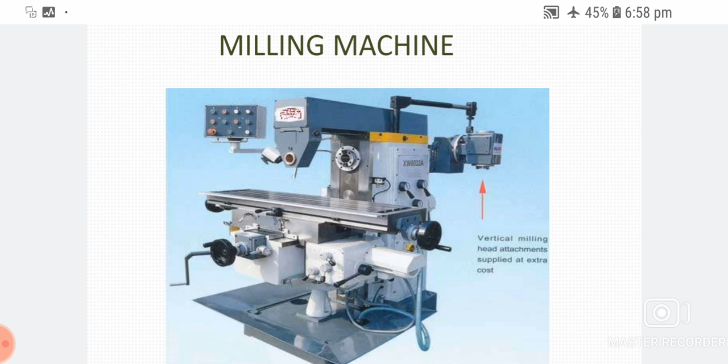Next, we can move to the topic of milling machine. There are three types of milling machines available in industries: one is the horizontal milling machine, another is the vertical milling machine, and another is the universal milling machine.

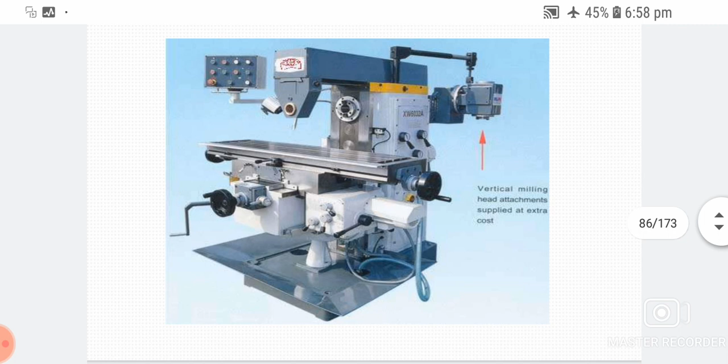Vertical milling head attachment is supplied at the extra cost.

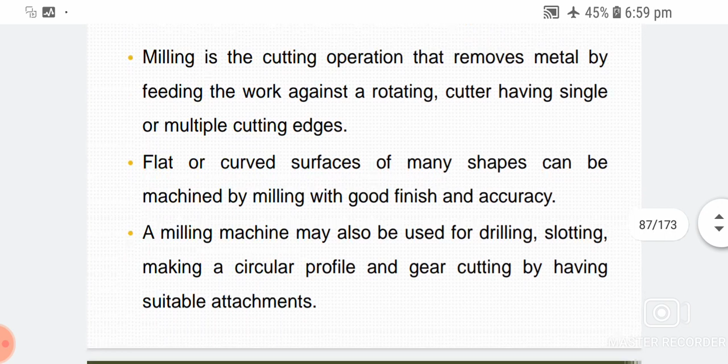Milling is the cutting operation that removes metal by feeding the work against a rotating cutter having single or multiple cutting edges. Flat or curved surfaces of many shapes can be machined by milling with good finish and accuracy. A milling machine may also be used for drilling, slotting, making a circular profile, and gear cutting by having suitable attachments.

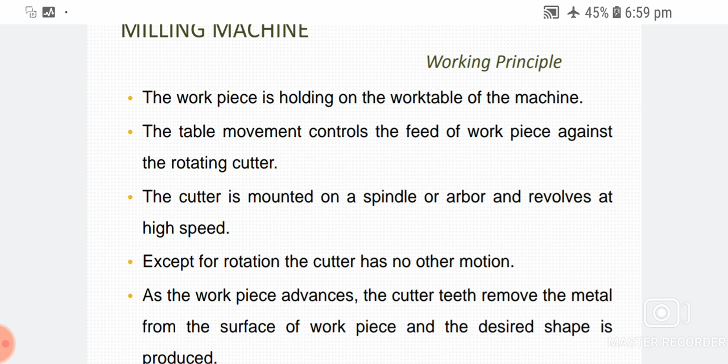The workpiece is held on the work table of the machine. The table movement controls the feed of workpiece against the rotating cutter. The cutter is mounted on a spindle or arbor and revolves at high speed. Except for rotation, the cutter has no other motion. As the workpiece advances, the cutter teeth remove metal from the surface of the workpiece, and a desired shape is produced.

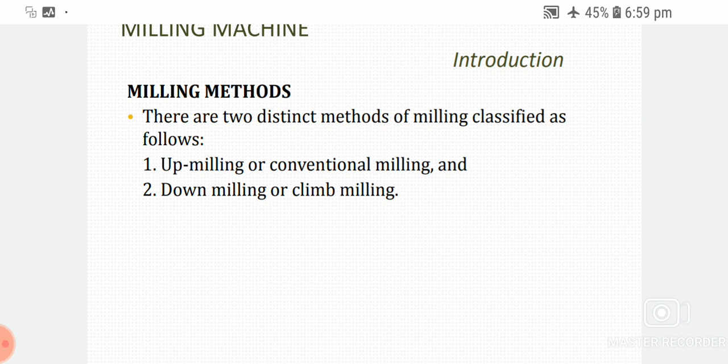There are two distinct methods of milling, classified as up milling or conventional milling, and down milling or climb milling.

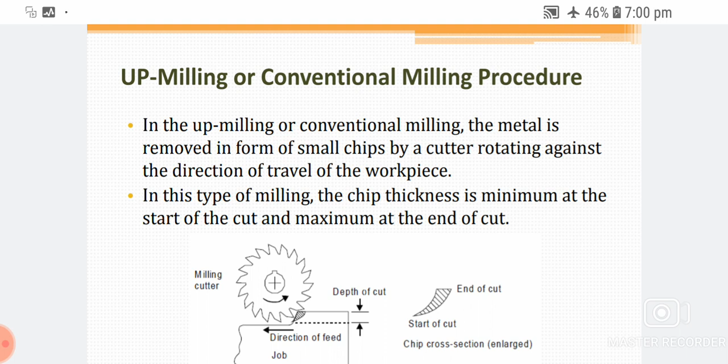In up milling, or conventional milling, the metal is removed in the form of small chips by a cutter rotating against the direction of travel of the workpiece. In this type of milling, the chip thickness is minimum at the start of the cut and maximum at the end of the cut. This is the principle of up milling.

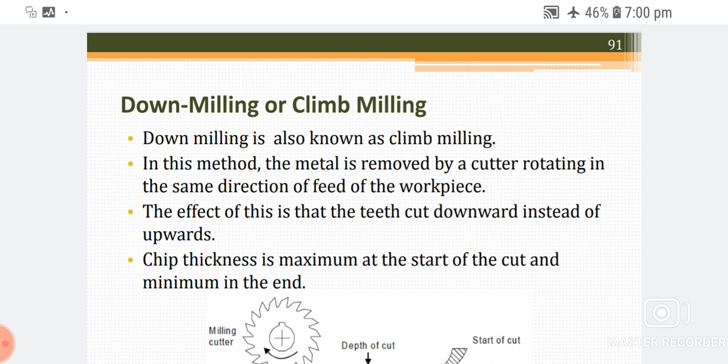Down milling, also known as climb milling: in this method, the metal is removed by a cutter rotating in the same direction as the feed of the workpiece. The effect of this is that the teeth cut downward instead of upward. Chip thickness is maximum at the start of the cut and minimum at the end. This is the principle of down milling, as shown in the diagram below.

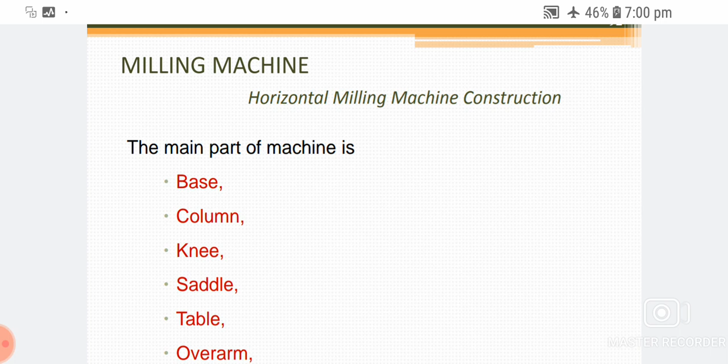Horizontal milling machine construction. The main parts of the machine are: base, column, knee, saddle, table, overarm, arbor support, and elevating screw.

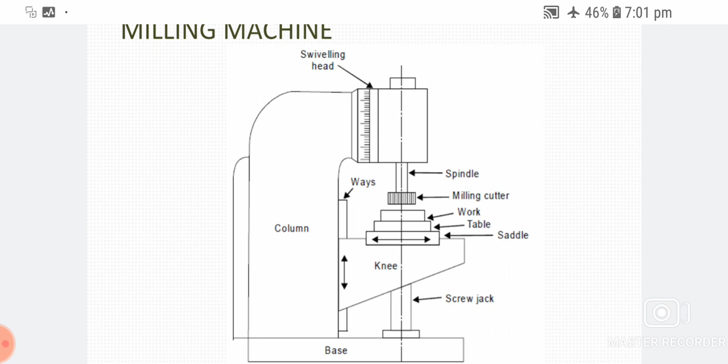A column and knee type milling machine. At the top is the swivelling head and spindle with the milling cutter. At the bottom side is the knee screw jack, which supports the knee, saddle, and table work.

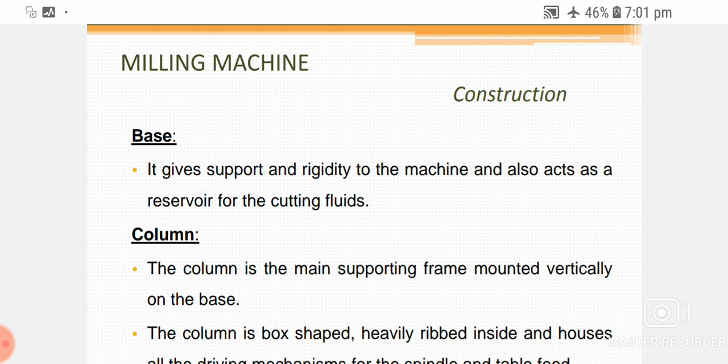Base: the base gives support and rigidity to the machine and also acts as a reservoir for the cutting fluid. Column: the column is the main supporting frame mounted vertically on the base.

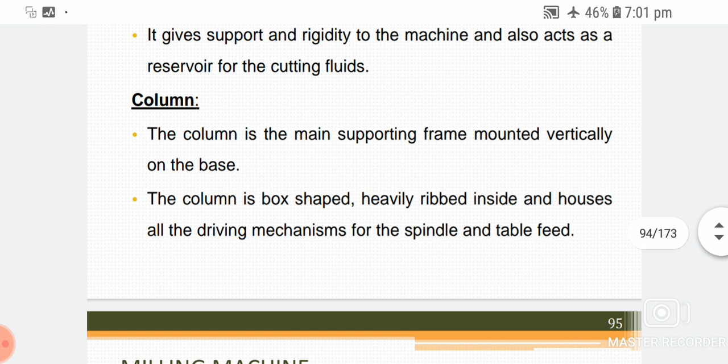The column is box shaped, heavily ribbed inside, and houses all the driving mechanism for the spindle and table feed. Knee: the knee is the rigid casting mounted on the front face of the column.

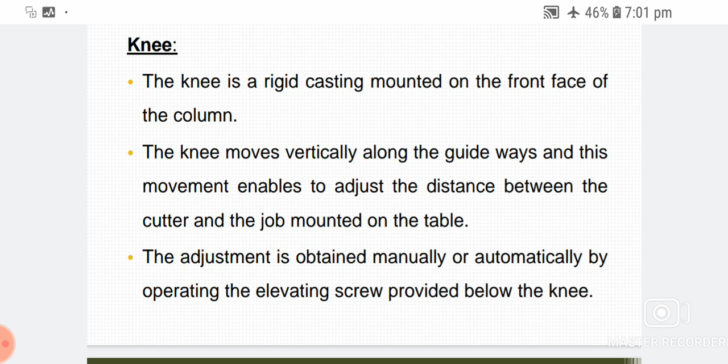The knee moves vertically along the guideway, and this movement enables adjustment of the distance between the cutter and the job mounted on the table. The adjustment is obtained manually or automatically by operating the elevating screw provided below the knee.

Saddle: the saddle rests on the knee and constitutes the intermediate part between the knee and the table. The saddle moves transversely, or crosswise, on a guideway provided on the knee.

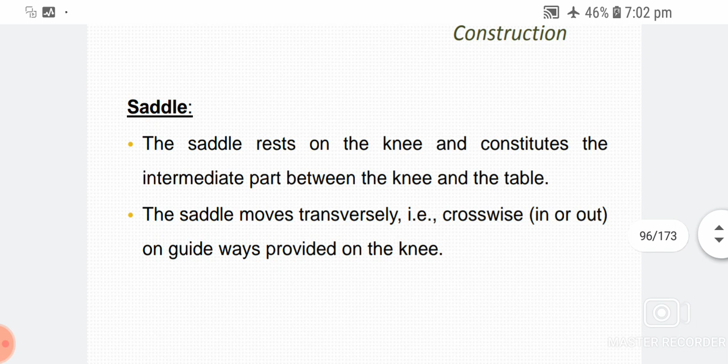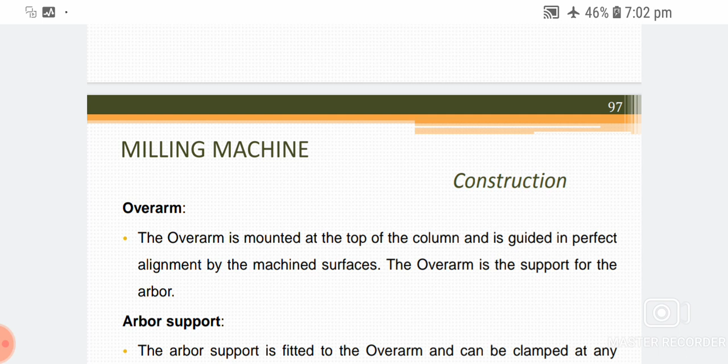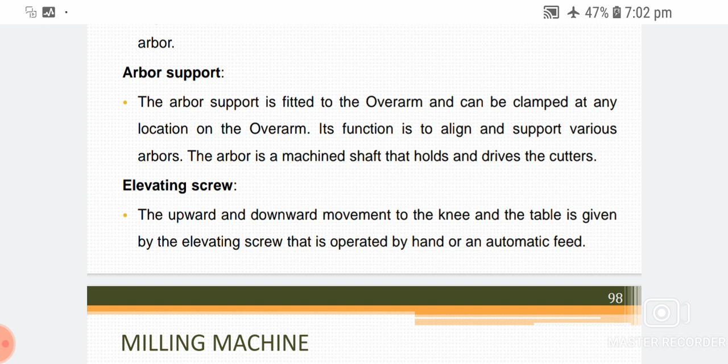Overarm: the overarm is mounted on the top of the column and guided in perfect alignment by a machined surface. The overarm is a support for the arbor. Arbor support: the arbor support is fitted to the overarm and can be clamped at any location on it. Its function is to align and support various arbors. The arbor is a machined shaft used to hold and drive the cutters.

Elevating screw: the upward and downward movement of the knee and table is given by the elevating screw, which is operated by hand or an automatic feed.

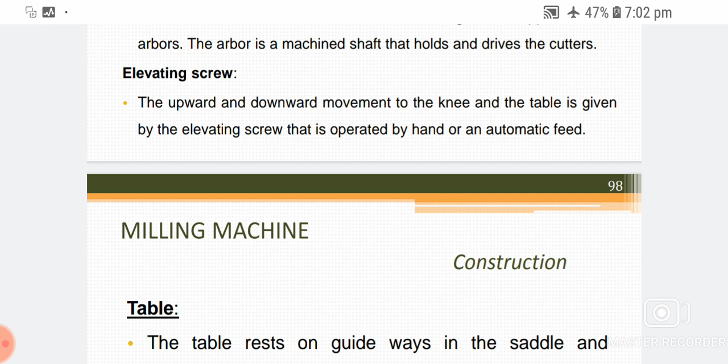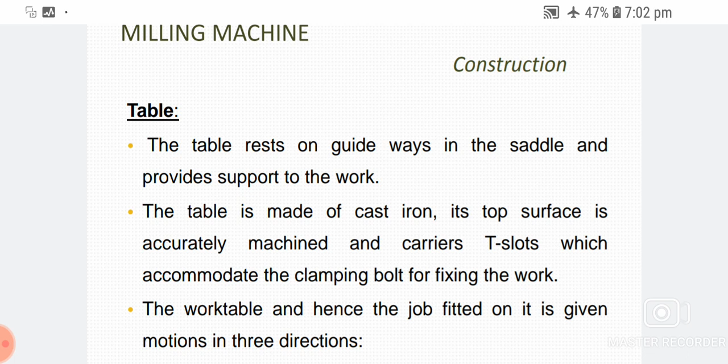Table: the table rests on the guideway in the saddle and provides support to the work. The table is made of cast iron. Its top surface is accurately machined and carries T-slots which accommodate the clamping bolts for fixing the work. The work table and the job fitted on it are given motion in three directions.

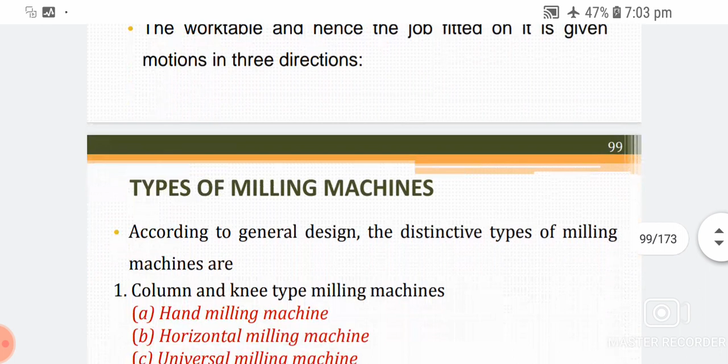Another topic: types of milling machines. According to general design, the distinctive types of milling machines are: column and knee type milling machine, hand milling machine, horizontal milling machine, universal milling machine, and vertical milling machine. Second category: planer milling machine.

Third category: fixed bed type milling machine, including simplex milling machine, duplex milling machine, and triplex milling machine.

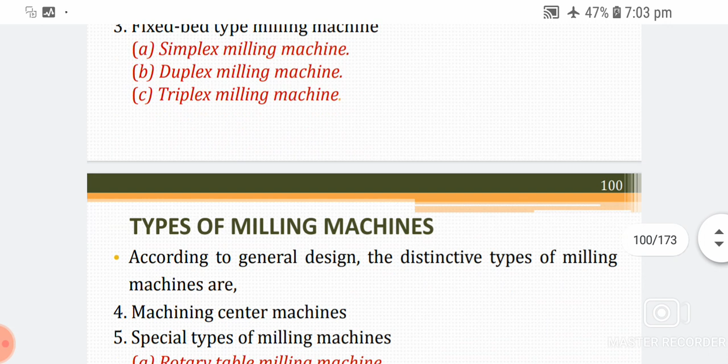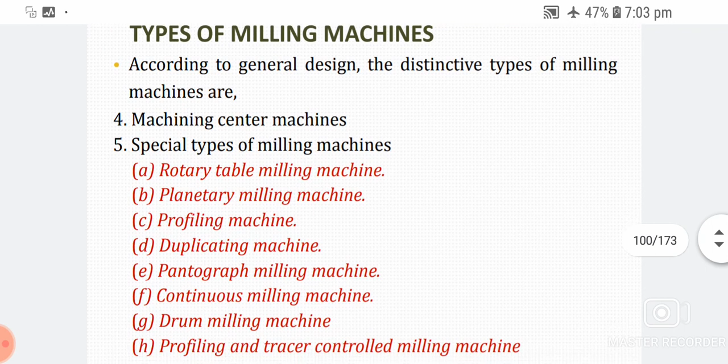According to general design, the distinctive types also include the machining center machine and special types of milling machines. Special types of milling machines are: rotary table milling machine, planetary milling machine, profiling milling machine, duplicating machine, pantograph milling machine, continuous milling machine, drum milling machine, and profiling and tracer controlled milling machine.

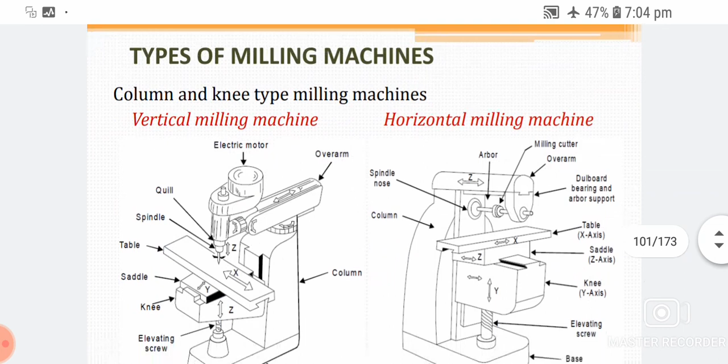Types of milling machine: column and knee type milling machine, vertical milling machine, horizontal milling machine.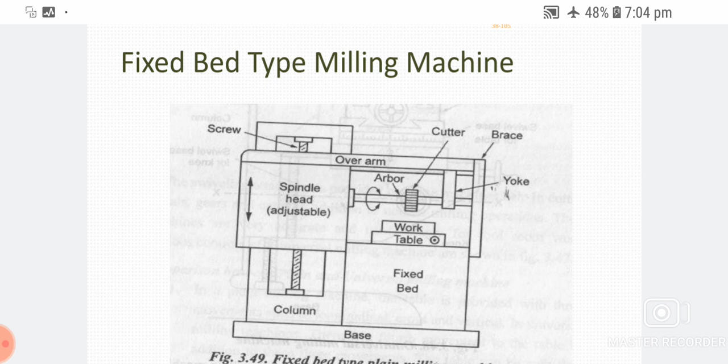Next, the fixed bed type milling machine: this has a spindle head of adjustable type, while the arbor is of fixed type. The work table moves on the fixed bed; only the cutter moves from one place to another.